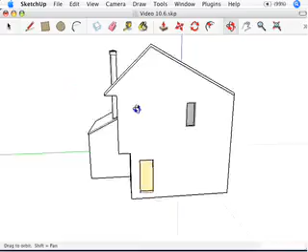This video is called Cutting Plans and Sections, the 6th video in Chapter 10 of Google SketchUp for Dummies. A section in SketchUp is kind of an interesting thing. Nothing really exists like a section in real life, but sections are incredibly important tools to help you get inside, basically look inside or cut away part of the thing you're actually building. People use sections both to work on the inside of things, and to show the inside of things or hide parts of things from their audience when presenting. So let's talk about sections.

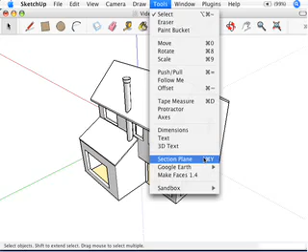To create a section, all I have to do is go to the Tools menu and choose Section Plane. When I choose Section Plane, I get this big funny cursor, a giant green rectangle. Actually, it's kind of a square. It's going to change shape depending on where you have it. Right now it's kind of loose, it's a square, but you'll see it turns into a big rectangle after I place it.

Now what I'm doing here is dragging this green rectangle around the model, and it's snapping to different planes. Notice how when it's on this slanted roof, it's actually slanted itself. Down here it's also slanted. Over here on this wall it's facing off to the left. On this wall it's facing off to the right. And if I hover over this round chimney, you see how it's spinning? Because it's always facing the surface you have it hovering on.

Okay, ready? This is going to be quick. I'm going to cut a section on this side of my house. Watch what I'm going to do — I'm just going to click. And what I've done is created this big giant section plane. See how it's a big orange rectangle like I said it would be? And the end of my building's gone, just like that. I can see that end of the building, but this building's gone.

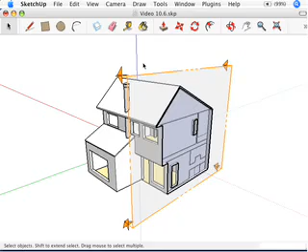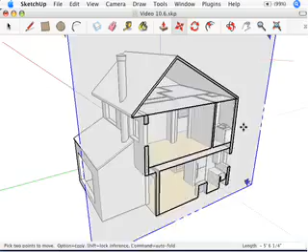What I've got to do is grab the Move tool at this point, because I want to move this section plane. I'm going to click on it and then just move it. You notice what's happening? You see how part of my model is being cut into with that section plane right there? Now, the important thing to realize is it's not actually disappearing. If I move this out of the way, I've still got the house there. But if we zoom in some, like this — as I move this section plane back and forth, I'm actually cutting through the house as I move through here. It's a pretty important concept to understand.

Let's get it to a good spot — that's kind of a good spot, sort of through a doorway. There we go, and there's my section plane. What I've done is actually placed that section plane. This is kind of an object in SketchUp, a strange thing. It's an entity, sort of like a guide or an edge or a face is, but it's what I would call a construction entity.

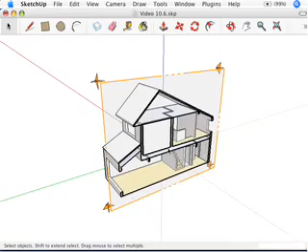It doesn't really show up — it's not part of your model. It's kind of a thing that you place in your model to help you model and show off your model, if that makes any sense.

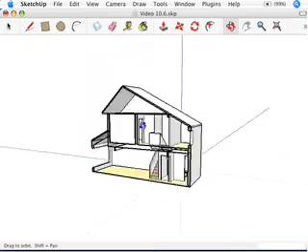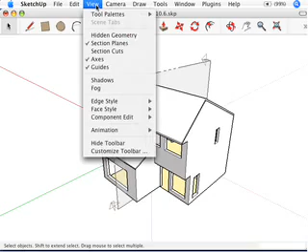Once we've got that section plane on there, it's kind of ugly, so I want to hide it. I'll go up to the View menu and deselect Section Planes. So what I don't want to see is the section plane I just created. What I do want to see is what's called the section cut, which is the cut that the section plane created. If I go to the View menu and deselect Section Cuts, the cut actually goes away. And if I go to View and say Section Planes, now I can see the section plane, but not the cut it's producing. So using those two things in combination, you can choose to watch the planes or the cuts, both, or neither.

It's kind of up to you, but the general premise is that a section plane, once I've changed or placed it, is actually creating this section cut effect right there on my model.

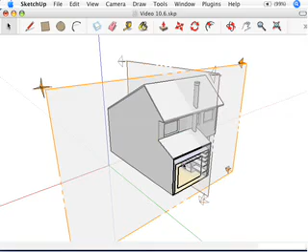Let's get another section plane. I'm going to go up to Tools, go to Section Plane, and this one I'm going to cut this way. I'm going to use the Move tool to move it over some. Let's move it—I'm cutting through the building this way now. What I want to actually do is cut through the stairs. So there we go. Now you'll notice what I have in my model is two section planes.

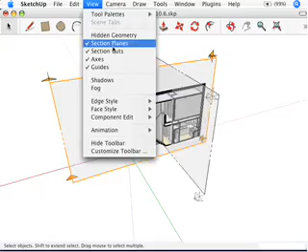I've got this one that's kind of gray and this one that's orange. You'll notice that the gray one is no longer cutting anything—see how it's not cutting through the house? It's just sort of placed there. Now if I go up to View and say hide my section planes, they both disappear, but the active section cut is the one from the section plane that was orange.

You can only, in general, have one active section plane at a time in a SketchUp model. There is an exception to that, but I'm not going to go into it.

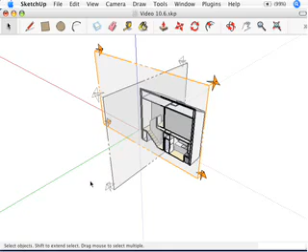What I'm going to do is right-click. Let's say I wanted this section plane, the one that's gray right now, that was cutting through the house this way—let's say I wanted that to be my active section cut instead. I'm going to right-click on it and choose Active Cut from the right-click menu. And when I do that, it changes, and all of a sudden that section plane is orange and the other one is gray.

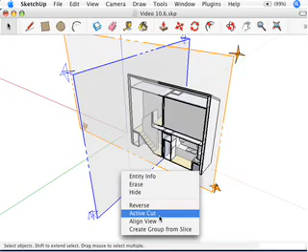Let's swap back. I'm going to say Active Cut, and so my cut is changing depending on which section plane is selected. Okay, I'm going to get rid of this section plane, the second one altogether. So let's just delete that, and we're working with one section plane again.

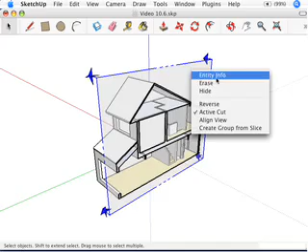Now, let's say I wanted to keep this section plane, but what I want to see is the other half of the house, the part that's being cut away right now. I don't have to create a brand new section plane—I'm just going to right-click on the existing one and go Reverse. And when I do that, it reverses the direction of the section cut, and now I'm looking at the other half of the house, the stuff that I had cut away with it the first time. And it's kind of that simple.

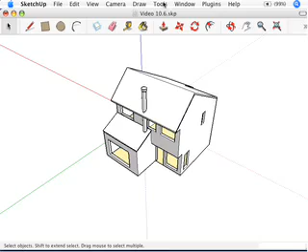Let's get rid of that section cut, and I'm going to create another kind of section cut. This is called a plan cut. So let's go to Tools—it's made in exactly the same way. I'm going to pick Section Plane, but instead of hovering anywhere on the model, I'm just going to hover on the ground so that the section cut is going to be completely flat, just like that.

And then I'm going to get my Move tool to move this up, just like that. I'm going to move it up 48 inches, which is 4 feet. It's kind of an architectural convention in North America to cut plans at 4 feet.

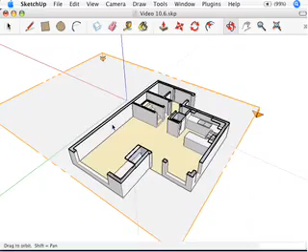Let's go up to View and Section Planes and deselect that. And now what I'm able to do is kind of see inside my house. This is great because this is the view I would use to start throwing in furniture and stuff like that. So I'm going to use that section plane that I just created.

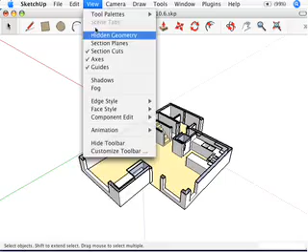This section cut allows me to see this floor really easily so I can kind of throw stuff in it. If I wanted to work on, let's say, the second floor, I would show that section plane again, grab the Move tool, and just kind of move this up to the second floor like that. And maybe hide the section plane again. Now I can work on the second floor if I wanted to—I could put some furniture in here. Okay, I hope that makes sense.

Let's see if there's anything else that I forgot to cover in this section. Nope, I believe that is exactly what I wanted to talk about. That concludes the video on adding section planes to your model for Chapter 10 of Google SketchUp for Dummies.